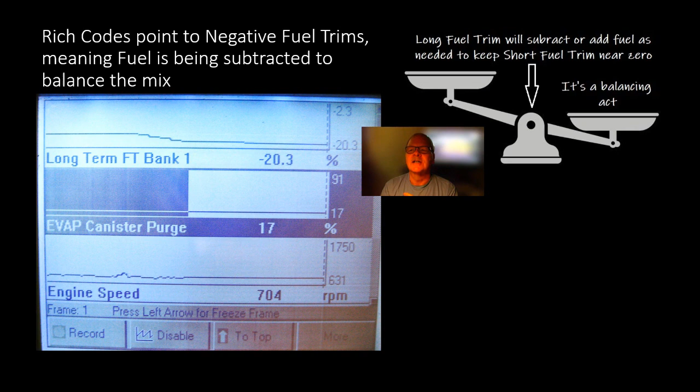But let's move on to some stuff that you're more likely to run into. Rich codes point to negative fuel trims, meaning fuel is being subtracted to balance the mix. So if it's subtracting fuel, it's picked up on a condition where there's too much fuel in there, and it wants to try to keep it balanced, because that's basically what it's shooting for.

Within a certain range, it can be bad enough so that it can't deal with it. But these things are very, very sensitive, in that whenever it sees that it's out of balance one way or another, initially, if something happens all of a sudden, the short fuel trim will begin to count in the direction it needs to fix that. And then the long fuel trim will pick up - it's watching the short fuel trim. The long fuel trim doesn't operate as quickly as the short fuel trim does, but it keeps ratcheting up a little bit at a time until it gets to the point that the short fuel trim returns to zero.

So the best thing you can look at if you think you've got a problem, or if you've got a code for rich or lean or whatever, is look at the long fuel trim and see what it's showing you, because the short fuel trim is not reliable at this point. You can look at the oxygen sensors, but if the long fuel trim has made those coarse adjustments to keep everything balanced at 14.7 to 1, the oxygen sensor is probably going to look normal.

Now, occasionally they have new codes in there now where if one's running sluggish, the oxygen sensor is not switching like it should, it'll tell you a slower response or something like that. But if you think you've fixed one, that's what I put in this little yellow chalk print down here.

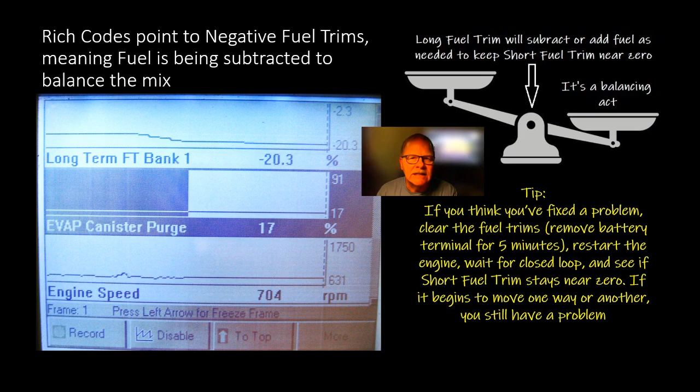Watch it when it closes loop. If that short fuel trim begins to walk, then you know it's not fixed. If the short fuel trim hovers around 0 after you've made your repair, when before your long fuel trim was way off - see, when you reset it, your long fuel trim will be on 0 and your short fuel trim will be on 0. As soon as it closes loop, it's going to try to correct for whatever it sees wrong. That's what this is about.

Now, newer platforms use Lambda readings. The screen you're seeing here is not a scan tool screen. This is a 5-gas exhaust analyzer that I had when I was at college. I got one of these - these things are really, really pricey. It's not anything you're going to pull money out of your hip pocket and pay for unless you're kind of a wealthy dude. But this one here, I was basically doing some testing with this sensor.

With this exhaust gas analyzer, it's about the size of a scan tool. But you got to let it warm up - let the engine warm up, so that there's not steam coming out the exhaust. You don't want any water being drawn into this thing in the way of heavy steam or vapor. Engine's got to be nice and warm, and this thing's got to be warmed up and ready. You stick the probe in the exhaust and it begins to read the concentrations of different exhaust gases.

Now this one here was just like it needed to be. If you look, your Lambda value, which is kind of like fuel trim but figured a different way - if Lambda is 1, that's the optimum reading you're going to get. This thing could tell what Lambda was just by looking at the exhaust gas, which is very interesting. If the mixture is too rich, Lambda will go below 1. If it's too lean, Lambda will go above 1. So if it's subtracting fuel, you'll see a number lower than 1 on your Lambda.

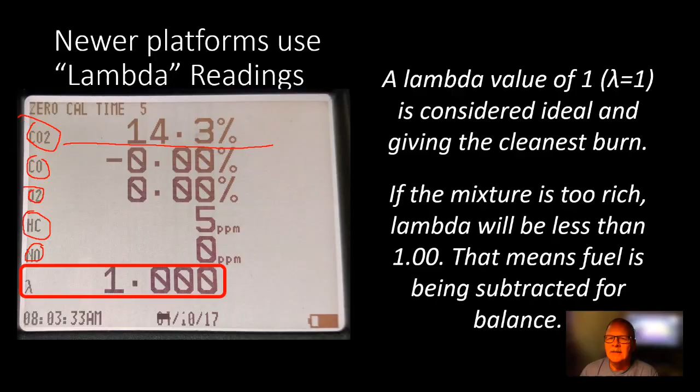Now these here are the basics. An ideal air fuel mixture is 14.7 to 1 by weight, 9,000 to 1 by volume. So for every gallon of gas you burn by volume, you're going to be burning 9,000 gallons of air.

Spark triggers a combustion. Hydrocarbons get oxidized, they create heat, and the inert nitrogen that's in here, which is 78% of what's in the atmosphere, expands and pushes the piston down, which turns the crank, which gives you your power.

And what you're getting out of this thing is you're getting water, and you're getting CO2, and you're getting some CO, you're getting some hydrocarbons, you're getting oxides of nitrogen, and there's several different compounds of that. So this is what's basically coming out.

Now what you want to do is have the 14.7 to 1 as near to that perfect setting as possible, because if it's really close to that perfect setting, you have very little of these other things coming out and a lot of CO2, which is what you're after, because we breathe out CO2, and so does every animal on the planet, and every plant on the planet breathes in CO2.

So we're basically supporting plant life with CO2, and our cars basically are putting out a lot of CO2. I'll talk a little bit more about that in a minute.

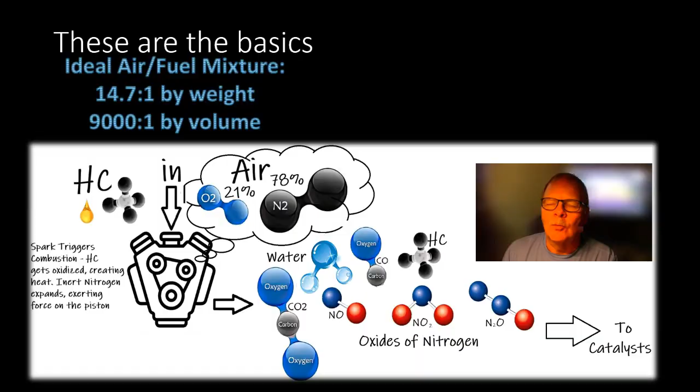Running rich means if it's running too rich, beyond what the fuel trim or system can handle, you're going to have CO, which is 1 molecule of carbon and 1 molecule of oxygen instead of 1 and 2, and hydrocarbons, which is no molecules of oxygen and a molecule of hydrocarbon. A balanced mix means high CO2 and low CO and HC.

You're making water though when you burn the fuel. So this is basically the most prominent items that are coming out of here. You got your hydrocarbons, carbon monoxide, H2O. These are the harmful gases you're trying to take care of.

You notice these go into the catalyst, the light-off catalyst, which typically it's going to be mounted really close to the engine on just about every vehicle out there. On a lot of your 4 cylinders now, it's crammed right up against the engine, so that the manifold just pours the exhaust right into it, and it gets hot really fast.

Gasoline direct injection cars actually will put more fuel in there to heat it up quicker. Of course, they know what the temperature is because it can be inferred by the stuff that they're measuring. But anyway, these are inputs after the burn.

This one right here, actually, this is the input that the PCM uses to determine what the fuel delivery should be. And then it reads the gas again, and it's making a circle. That's your closed loop fuel control.

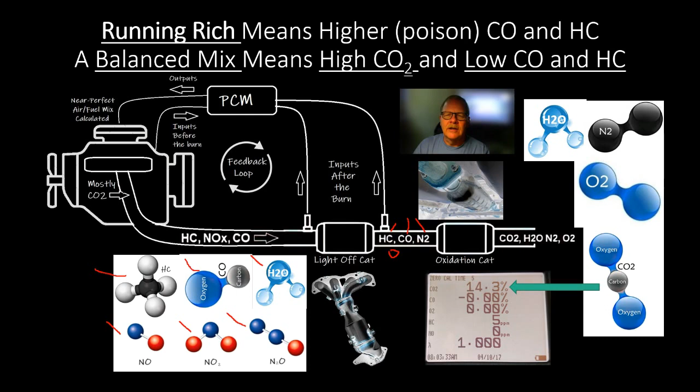Look, we're getting carbon dioxide. Did you know that 95% of what you see growing out of the ground in the way of a tree or anything else comes out of thin air? Only a very small amount, like 5%, comes out of the dirt. Of course you've got water, some minerals coming out of the dirt, maybe some fertilizer, but mostly you've got sunlight and carbon dioxide, and that's photosynthesis.

That's what makes plants grow. It needs the carbon dioxide. You take away the carbon dioxide, you ain't green, you're going to be brown, and you're going to have dead plants and trees everywhere. Of course, we're not going to take away all the carbon dioxide. There's probably going to be some.

But if you have a dome out there, like I read somewhere about Arizona where they had this dome where they closed it in and pumped an intense amount of carbon dioxide into it, and they planted these little tomatoes that are usually like the little Sweet 100s, those tomatoes grew as big as baseballs, and there were hundreds and hundreds of them. Because CO2 is good for plants, it's good for food, it's good for all that.

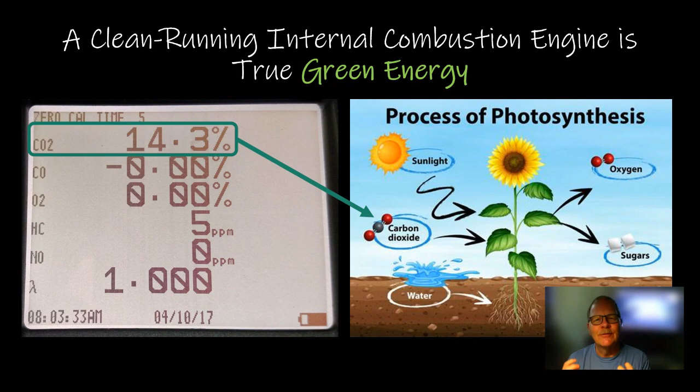So you might have noticed your exhaust is actually, a lot of times, your exhaust on every vehicle is going to come out on the opposite side of the car from where the gas tank is, unless you've got dual exhaust, right? So if the gas tank is on the left side, it's going to blow the exhaust out over the grass. CO2 has got an atomic weight of 44.

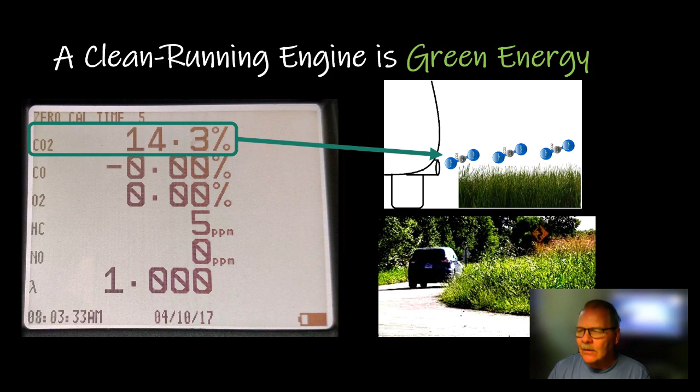Now, PCM inputs can be skewed: mass airflow, MAP, Baro, ECT. I have seen Baro sensors that, usually when a Baro sensor fails, it will actually fail lean, and it will cause the fuel trim to be increased. If it fails lean and the fuel trim goes up, it's thinking it's at a higher altitude than it is, so it puts less fuel in there. And then the oxygen sensor picks up on that, dials the fuel trim up to balance everything, and that's kind of the way it goes.

But since it's monitoring the incoming air, any kind of air leak between the mass airflow sensor and the engine will cause issues. Now, air leaks in the air filter or in front of the mass airflow sensor will not typically cause that kind of problem. But if you've got air leaks in the plenum or something like that, you're going to have some issues here.

Now, a lot of vehicles now have a MAP sensor and a mass airflow sensor both. The MAP sensor is a good data point for EGR flow. If you've got EGR flowing, when EGR is flowing it lowers the engine vacuum a little. So if the PCM is watching this MAP sensor, it turns on the EGR, opens it up a little bit, watches for MAP to respond to that, and it kind of knows it's flowing.

Of course, it has other ways too. It can also look at the oxygen sensor, because you're replacing some of the oxygen with inert gas, so you're going to see the oxygen sensor drift a little bit toward the rich side. But intake air temperature and engine coolant temperature are factored in, along with throttle movement and position.

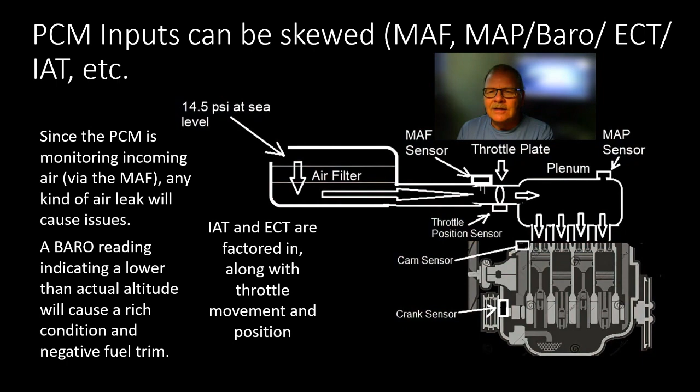This is most prevalent on a cold engine when you first try to start it up. Let's say the temperature was 90 yesterday and suddenly it dropped to 40 today, and 90 was really close to that substituted value for the intake air temperature yesterday, but not today. It's going to put all kinds of extra gas in there when you try to start it up. It may even flood it, foul the spark plugs, not start at all. So there's a lot of little nuances to knowing how these things affect the air-fuel mix, and even cold enrichment.

Now, fuel delivery versus unwanted fuel. If the inputs are skewed, the fuel delivery can be wrong for that reason. But what if all the inputs are right? What if the fuel pressure is right? Sometimes I had seen fuel pressure issues.

I talked one time about this Cadillac Escalade, an '07 model, that a girl brought in. You've probably heard this before, so just tune me out if you have. She came in and said, 'Hey, I've got a traction control light on my Cadillac Escalade.' So I went in there and found a network code. I don't remember what it was, but it was the only code in that system. I said, that's weird, and since we weren't doing a lot of network stuff at that point, I told her she ought to take it to the Cadillac place, that they probably had a reflash or something. I didn't look it up on Identifix or anything, I just sent her to the Cadillac place.

So she goes over there, comes back, and wouldn't let them do anything. I said, what'd they tell you? She says, they told me I had a bad fuel pump and my fuel pressure was really high, and that was causing the light. And I thought, what? We've got traction control and they're talking about fuel pressure? I don't understand, I don't know about that.

This particular one has the fuel pressure regulator built onto the pump down in the tank, and they wanted $1,800 to put a fuel pump in it. She didn't have $1,800 to give them, so she came back over to us and we checked the fuel pressure, and sure enough, it was 160 pounds. I'm thinking, my goodness, there is a problem here. So we got her a $425 fuel pump from Advance Auto Parts, popped it in, and got the pressure down where it was supposed to be. Lo and behold, the code was gone and the traction control light was gone.

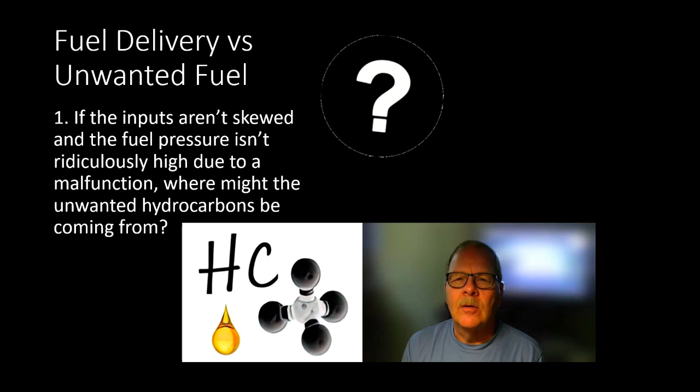Now, fuel delivery versus unwanted fuel. The PCV system is a possible source of fuel vapor if the oil hasn't been changed in a long time. You might remember the story I told you about my dad. My mom had a '91 Chrysler New Yorker, and he said there was a power loss light on. I switched the key on three times and got that thing to flash out the code, and it was a code 17. I told him, this thing needs a thermostat.

He said, well, I can put a thermostat in it. He had his own shop for long years. So he goes and puts a thermostat in it, and then drives it back. Everything's fine. So about 10 days later, he said, I'm gonna change the oil in this car. So he changes the oil, and then he calls me kind of frustrated and goes, all I did was change the oil and now it won't idle.

Well, he had a rich running condition because it had been running too cold. It had contaminated the oil with fuel, and it was pulling that through the PCV system. It had skewed the adaptive fuel trim so far that when that expected fuel was no longer in the oil, the car wouldn't idle. It was like a carburetor valve adjustment.

Now, it had multi-point fuel injection. And I told him, take the battery terminal off for a little bit and then put it back on and see if it still wouldn't idle. And so he did.

Now, a lot of the time on some of these Dodges, because of this adaptive learning, I've seen Dodge pickup trucks where somebody would change the battery and it wouldn't idle until they drove it around for a while, and then it would learn to idle again. That's because the throttle body's dirty. So if you're going to change the battery out, you may as well go ahead and clean your throttle body out too. Not a bad idea.

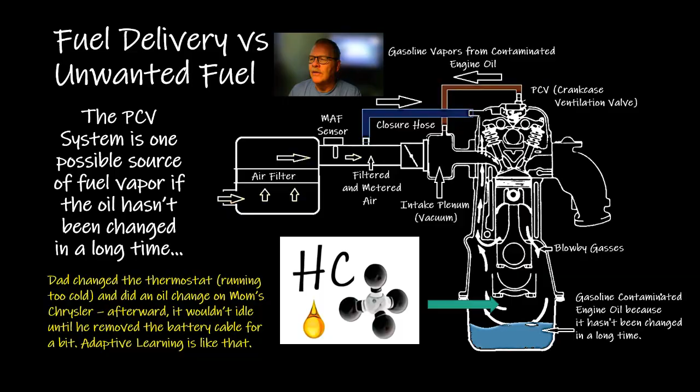So another potential source would be the EVAP system. Now, if somebody has saturated the evaporative canister by packing the fuel tank, that can cause a rich condition. I have seen that on more than one occasion.

What typically happens, this one guy had a Dodge, it was an 03 model Dodge Dakota that his wife drove, and periodically it would be sitting there idling and it would sort of fumble around and stumble a little bit or do something wacky with the idle. It didn't really cause any problem for them other than the fact that they didn't like what it was doing.

So he brings it over there, I plug the scan tool in, pull up a bunch of stuff, and I'm watching it. I noticed when it starts purging the evaporative system, when it turns on the purge solenoid and starts pulling purge gases out of the evaporative canister, drawing fresh air through it to get rid of the vapor stored in there from the gas tank, it would basically slug it, to where all of a sudden it had too much gas, and the idle speed control would correct for that.

And so I said, George, have you been packing the gas into this tank when you fill it up? Do you go click, click, click, click, and keep trying to get more and more gas in it? And he said, yeah, I always do that. I said, stop doing that, this problem will go away. And he did.

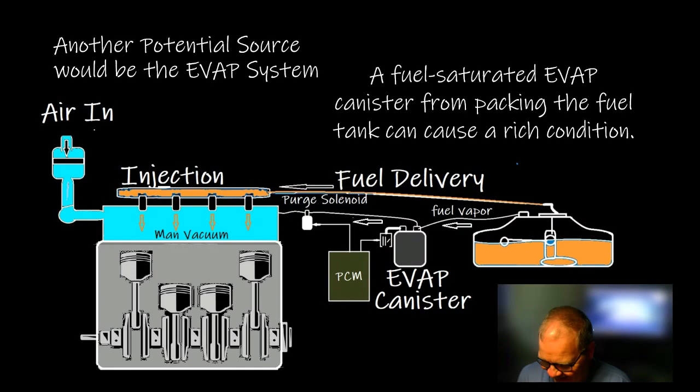There was another lady who called me one time when I was working at the Ford place, and she says, I've got a problem with my Windstar or whatever it was she was driving, a minivan, and she says every so often it would stumble and almost die, and then the idle speed control would kick up and it would almost lunge and crash into the car in front of her. So without even looking at the vehicle, I said, do you pack the gas into your gas tank when you gas it up, or do you stop after it clicks off? And she said, I always pack it in there. And I said, stop doing that and you'll stop having that problem.

Now, it's not going to be exactly the same on every vehicle, but the purge valve is a normally closed valve. And when the PCM operates it, usually it operates it on a duty cycle, it'll go tit, tit, tit, tit, tit, or something like that. Now, if this purge valve is always open, and it's not supposed to be, if for any reason it's always open, like if it's just malfunctioned on the inside and it's open all the time, when you gas it up, this vapor from this tank will actually push a whole bunch of vapor through here.

It'll go into the intake, and it will put enough in there so that it will condense, and whenever you go to start it, it will wet the plugs and make it hard to start. You'll spin it, spin it, spin it, and I've seen that on all kinds of cars. I've seen it on Fords, Chevys, these little Hyundais and stuff like that. It's got those little purge valves.

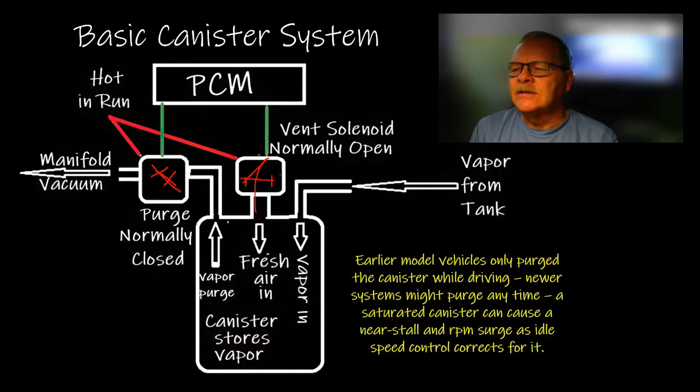All right, let me see if we can move on here. Leaky injectors are unwanted fuel that come from somewhere that's not commanded.

What was odd about that was when I hooked the scope up to it, the cylinder that this injector was feeding had a really high spike on it, which seems counterintuitive to me, but anyway - a dripping injector will cause that too.

Now, typically what a dripping injector will do is it'll show up when you first start it. It can make it start hard. There was a Thunderbird I saw one time with a V6 in it that, whenever it was working right, you just breathe on the key and it fires up. But this guy was having it spin a full 40 seconds, it seemed like, before it would ever fire up. When it finally fired up, it ran okay.

What I found out on his was when I pulled the injectors out of it, I looked at all 6 of the injectors, and no fewer than 3 of those injectors had tips that were clean. The other ones were all dirty.

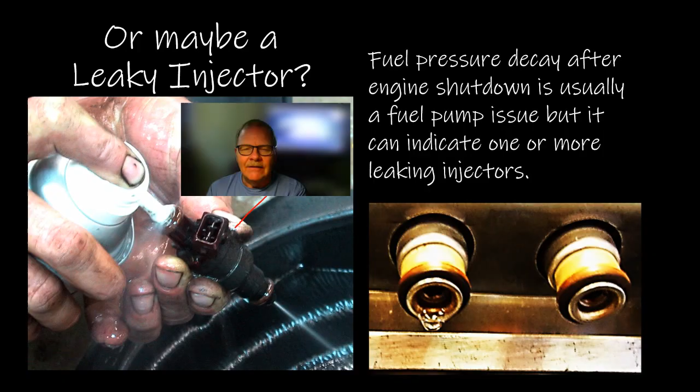Now the pressure regulator diaphragm can leak and cause extra fuel to go in there. I actually saw one truck that destroyed the engine because of a really bad fuel pressure regulator leak. The fuel gets past the diaphragm and gets fed up through the vacuum into the intake, so you've basically got it dribbling gas in the intake. If it dribbles enough in there, it can hydraulic lock one or more pistons, which is bad news if you got a good strong battery and a starter - when that piston comes up, it can just bust all kinds of stuff and ruin everything.

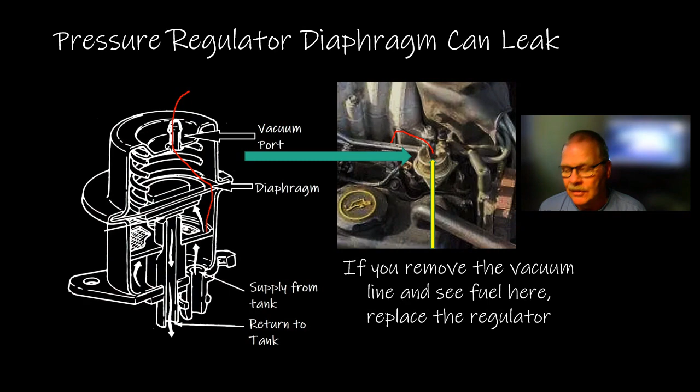All right, this is a 2007 Silverado with a rich code, belonged to my friend. He sent me a text message with a picture that had been taken. He saw a check engine light, didn't feel any drivability problems. When he went over to the parts store, they plugged in their little Innova scan tool and got a P0175, fuel trim system rich bank 2. He sends me the text, and I said I don't know what that is off the top of my head - it won't usually be the oxygen sensor if you've got a rich code.

Whenever an oxygen sensor dies, most of the time it's going to die lean, and then it's going to show you a lean code. Even though your engine may be running rich on that bank, the oxygen sensor is going to be reading lean, and you may feel drivability issues on that. Some of the Dodges used to have the oxygen sensor fail at about 0.6 of a volt, and it would try to continually correct for that, even though the oxygen sensor wouldn't respond, and it would cause it to buck and jump and all kinds of stuff.

You could look at the fuel trims, and it looked like a big giant ugly sawtooth, more so than usual. So I went over there and I pulled his code.

Also, I got a P0172 with my tablet, my Zurich scan tool that I paid $1,000 for at Harbor Freight. This is the screen print from that scan tool. And I gerrymandered his serial number down here because I didn't want anybody looking at his VIN number. It's just a privacy thing.

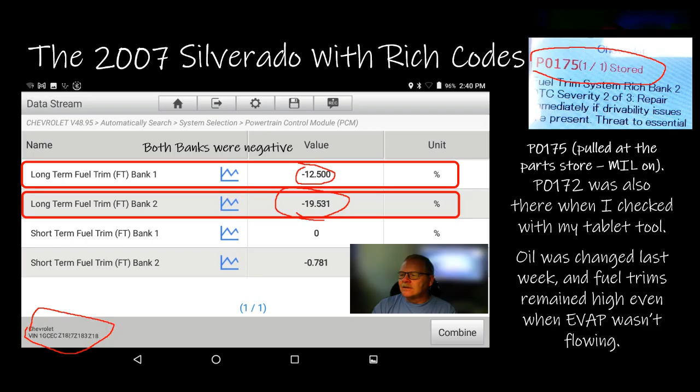Okay, so I got to thinking about this. Now, I saw a 2004 Chevy Tahoe I talked about a few years ago that was really hard to start sometimes when it was cold. And the first couple of times we started it cold, it didn't do that. But the next time it did. It was flex fuel, and it would wet the plugs.

And the fuel composition sensor on the scan tool was reading 45% alcohol. Basically that sensor puts out a signal, a hertz signal, you know, and we measured that too. But the owner never used anything but regular fuel, so we know it didn't have 45% alcohol in it, unless somebody had come and dumped some in there.

Hadn't seen this before, but whenever it thinks there's alcohol in there, it overcompensates, puts too much fuel in there, because if it's got that much alcohol, it needs to put that much in there for the thing to start like it should. As it turns out, this is basically a sensor input that skews what the engine controller is doing with the fuel. Now, this Chevrolet Silverado had rich codes.

It had 29% alcohol showing in the fuel alcohol content. And I said, this is like that other one. What I didn't see on the scan tool I was using on that Tahoe, and it was 3 years older than this truck, was I didn't see anything about resetting the fuel composition.

But on this one, I did. I saw a little button. And you know, this thing was thinking it was 30% alcohol. It was over fueling, and the O2 sensors picked it up, subtracted the fuel, and to keep short fuel trim balance near zero, it was subtracting a substantial amount of fuel.

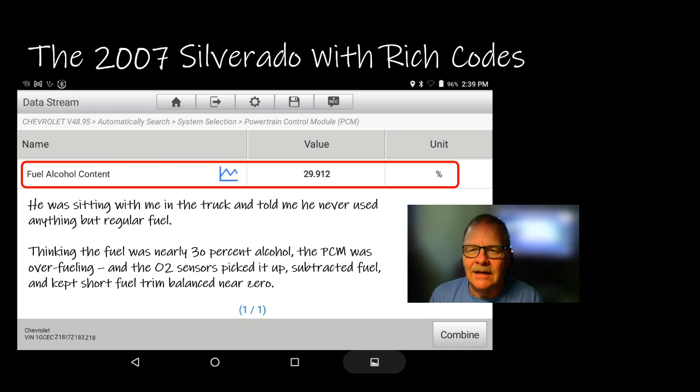Whenever those numbers get into double digits, that's when I get to worry about them. If they're bouncing around like 6 or 8, I don't bother them. But if they get into 11 or 12, that's when I start to take them seriously.

The tool had a reset composition sensor prompt, so I did it. I reset it, and the new fuel composition sensor percentage dropped to 3.4. I typed that number in because I forgot to do a screen print of the new number reading, but that's what it read. The fuel trim's normalized. The proof was in the pudding.

And basically we cleared all of that out there and fired it up, and they all stayed real close to zero, down in single digits, just bouncing around there. So all I had to do on this one was reset that fuel composition sensor with the Zurich scan tool, which is basically a launch scan tool, is what it basically amounts to. I just wanted a tablet tool so I could do a little bit more advanced work other than having to depend on somebody else's scan tool.

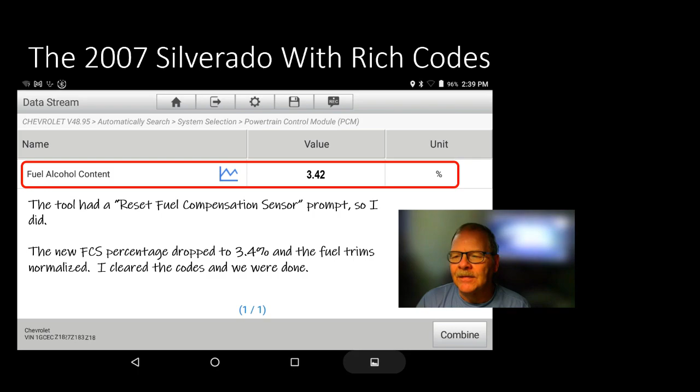And so, anyway, think carefully before you're changing parts. Gather good data, interpret it, and make the wisest choice that you can. Start with the cheap and easy probable stuff first, if you do decide to change parts, because it only makes sense. Like, for example, if you got an overheating problem and you don't see a busted hose somewhere, it's smarter to go ahead and put a thermostat in it if that's cheap and easy to get to, than it is to decide to put head gaskets on it before you've even checked the thermostat.